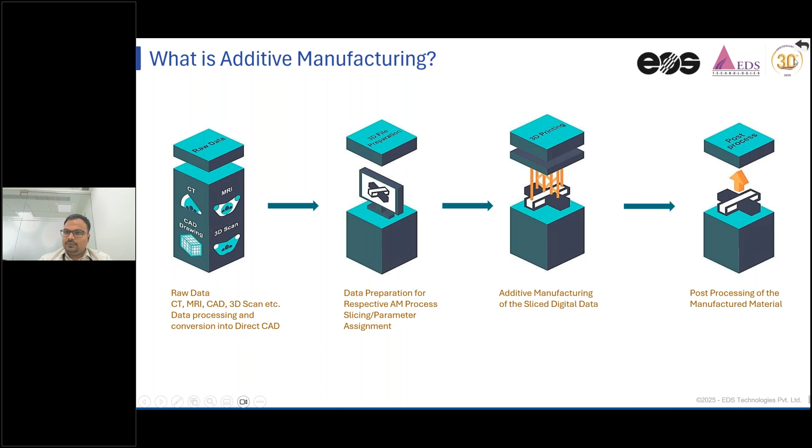Depending on the final requirement, the tolerance, the functionality, or the quality of the component, you can choose the post processing. There are several post processing methods available to impart functionality to the component. So that's a brief about 3D printing, and now we'll look into the applications of drones.

Today, mostly drones are seen in applications in day-to-day life, either solving problems of surveillance or security purposes, or in defense, where we see a lot of unmanned aerial vehicles and other drones which carry payload for attack or other defensive purposes. So there are defense drones, and then there are security purpose surveillance drones.

The second application we see from the drone industry is in the agricultural field, where we can reduce the manual effort in doing tedious agricultural work, and kind of automate and reduce the effort for mankind. The third use case is to simplify the transportation and supply of essential goods, whether it's medical supply, food supply, or any other essential supplies. The next application seen is for rescues or fire rescues, or fire operations performed through drones.

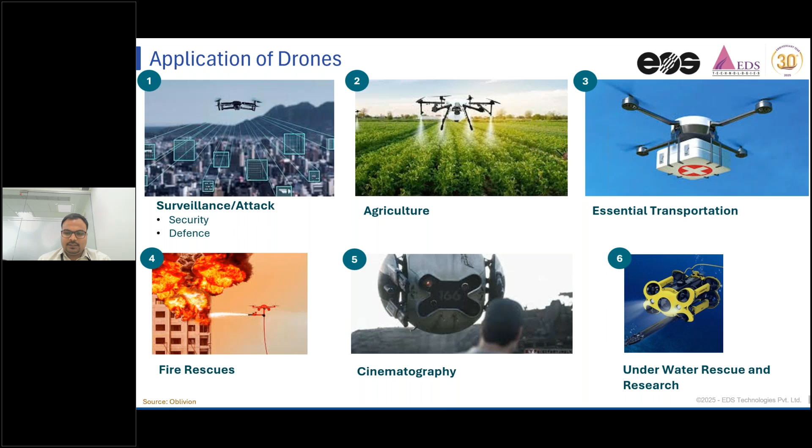Drones are widely used in cinematography also, to make movies or videos, corporate videos or commercial videos, photography etc. Next we see drones used for research purposes underwater, for Navy applications and other research works. So these are the broad areas of applications from the drone. I hope some of your drones fall into these categories of applications.

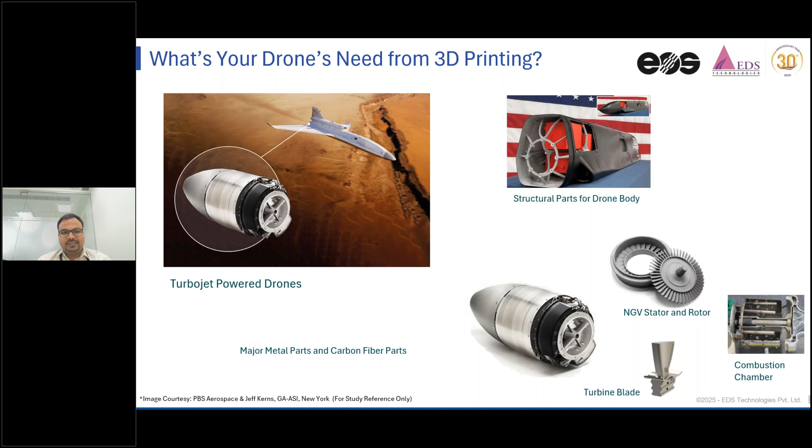Now let's understand, if your drone comes from a powered engine, that engine would require metal parts - most probably a stator or rotor, NGV stator rotors or turbine blades from compressor or combustion chamber, or you may require the complete metal frame also. So mostly UAVs or drones using these turbojet engines come from defense purpose drones, and they have a majority of metal parts and carbon fiber parts along with it.

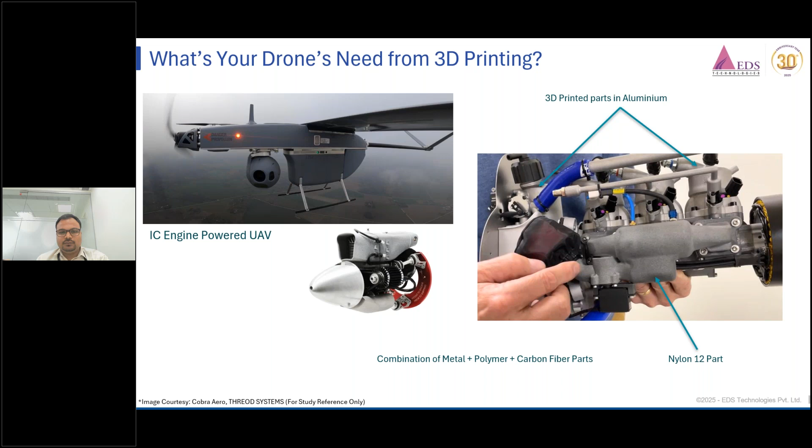Second category, if your drone is IC engine powered, you might require metal parts again - typical engine components like cylinder heads, or pistons and things like that, which are typically made in aluminum material. You might find high temperature components also, and a few plastic parts in the engine, which are nylon 12. So from this category, we see the majority of the component needed is either metal or polymer, a few polymer components, and a combination of carbon fiber parts as well for lightweight applications.

If your drone is battery powered, you might need solutions for battery management systems or batteries, and then fixtures to batteries and fitment, and the frames of the drones, or enclosures for the drones, or drone mounting.

Now, in order to solve all these challenges in the drone industry, what solutions do we have to offer?

From EOS, we have laser powder bed fusion technologies to manufacture the polymer part. We have the selective laser sintering process, which is a support structure-free process and a very productive process available in the market, and it's considered one of the industrial production solutions also from the 3D printing segment.

And secondly, for metal printing, we have direct metal laser solidification technology with us, which again uses the laser to melt the metal powders. It can melt almost any category of alloys, and give the functional part, whether it is an industrial purpose component or a lightweight component used for the UAV or drone applications.

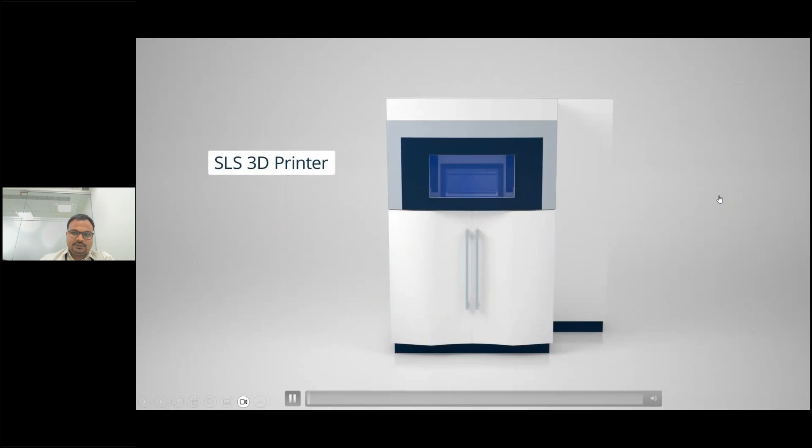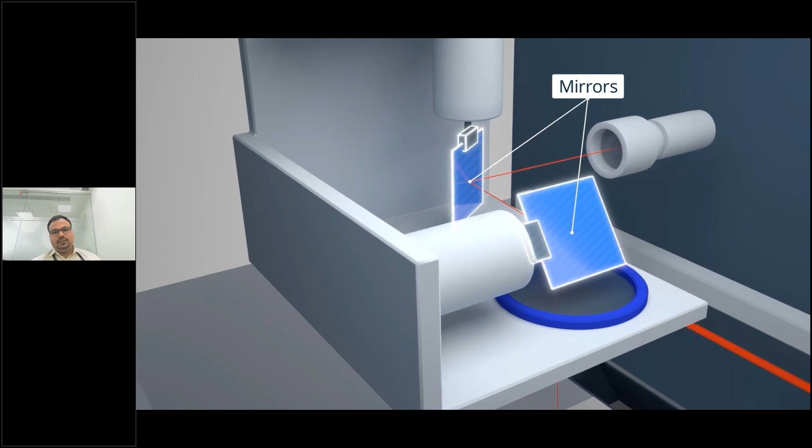So to begin with, what is the SLS process? I've taken a video illustration here. We have taken an example of our P3 machine, which has the dispensers on top. These supply the powder, and in the middle you see the recoater, which spreads the powder because it's a powder bed fusion process. Then we have heaters to preheat the thermoplastic nylon material, and then the main power unit comes for the curing, which is the laser.

The laser travels through our scanner, and this galvo scanner addresses all the contours and all the details of the layer we spoke about earlier - that layer information. This way the laser is able to address all the layered information one by one, and it begins with zero and then ends up with the height of the component.

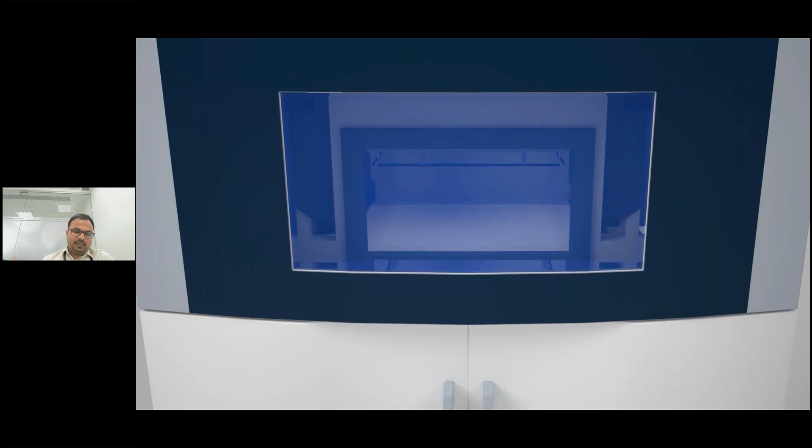And once the printing is over, we take out the exchangeable frame and unpack our component. This process is very simple in many ways because it doesn't have the hurdles of support structures - it's just depowdering that we have to perform, and our parts are ready. We take the part and directly use it. So this is about the SLS process.

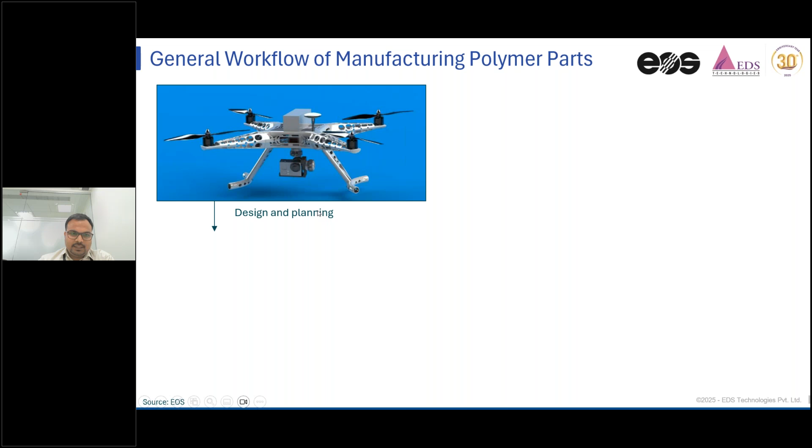Now let's understand how the general workflow works for the SLS process. So you have a design model, as I explained earlier, and then you put that design model to the printer, and we print that component. It looks like this, and then that component has to be depowdered.

So we have to just finish the component by brushing it or by doing glass beading. And once that part is finished, we take the part and directly use it for assembly, and we integrate the electronics on it, and then the product is ready. So it is as simple as that - it doesn't need any toolings, or any special curings in between.

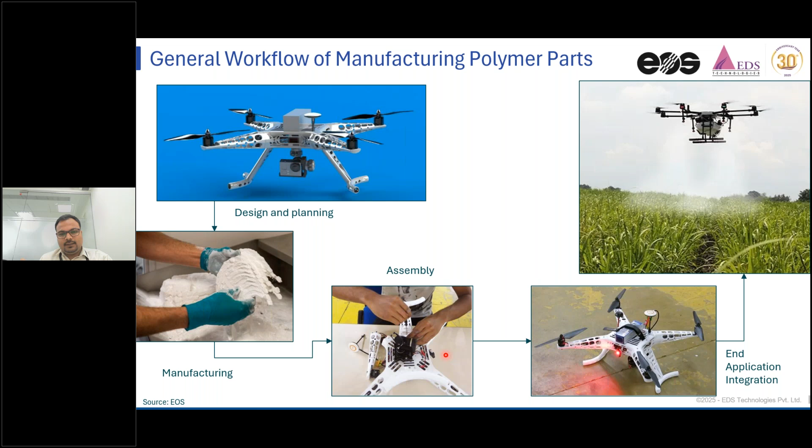Depending on the color or finish, you can choose to color the component through painting or dyes, but this is the natural finish that you get out of it.

Now what happens to the powder or the raw material? Why do we call this a sustainable production method? Because we are able to claim the old powder from the previous build and reuse it. We save the old powder, take new powder, and refresh the old powder, which is ready for the next use. This is how we reuse the material in multiple cycles and get value out of it, which unlike most other 3D printing processes, don't offer such reusability of materials. It imparts sustainability.

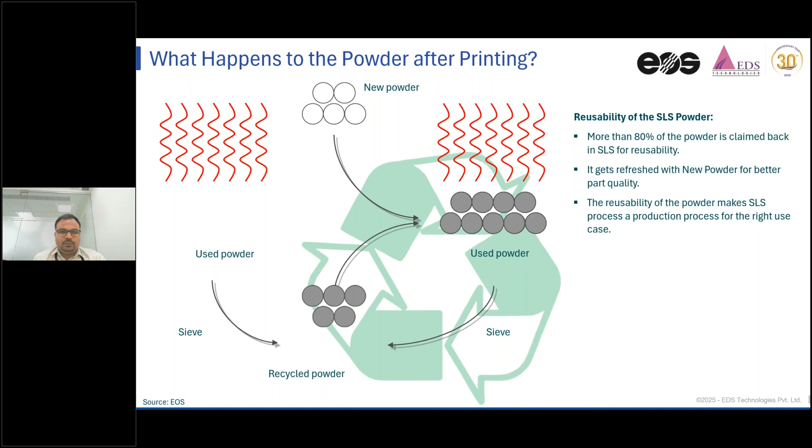Right now, with a few of our selective materials, we are able to achieve 80% reclamation. If we are printing 15 to 20% of the volume out of the quantity we have taken, we end up with almost negligible wastage in the process. Since there is very minimum wastage, this process becomes very sustainable.

For example, we take the job, the soft model or program, and the powder for the first use, and send it to the printer. The printer gives the outcome as a physical part, and the used material is recovered. We sieve that material and refresh it, and we are able to reuse it. That's how we reclaim reusability, and this material can be recycled over a number of uses, imparting sustainability in the manufacturing process.

Coming to the software part, how do we prepare the data? The SLS process is one of the simplest processes of 3D printing to prepare the data and print the components in a hassle-free manner.

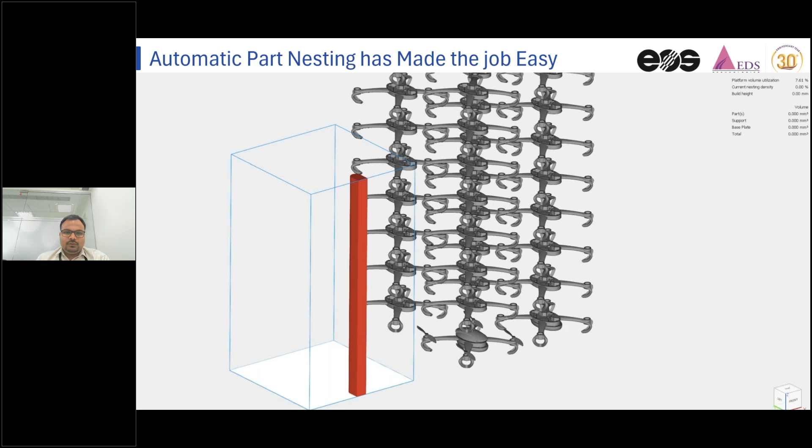We just load our data into the software, and software nowadays is smart enough to auto-orient, auto-position, and auto-place the component in the machine environment. We just give the command, and it takes care of positioning the parts the way they have to be printed, which we call nesting. With this smart nesting mechanism, the SLS process is one of the most reliable and easy processes to get your parts printed from 3D printing.

Coming to the finish, what is the stage when you can use the SLS part? Honestly, you can use the SLS part at any stage. You can take out the part, just depowder it, dedust it, and use it. It's up to your choice.

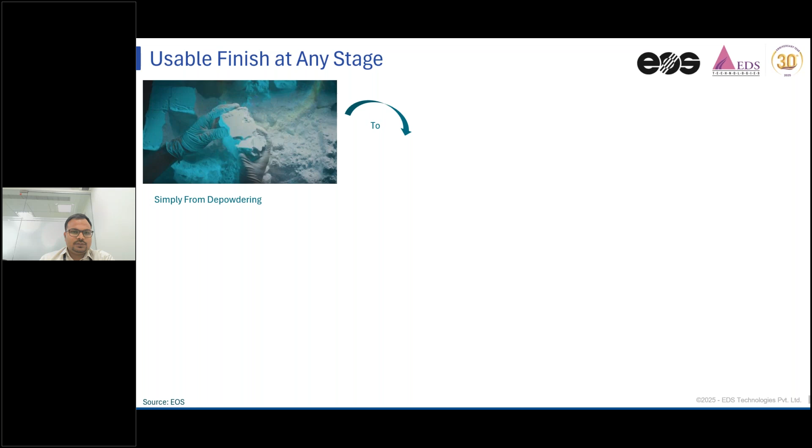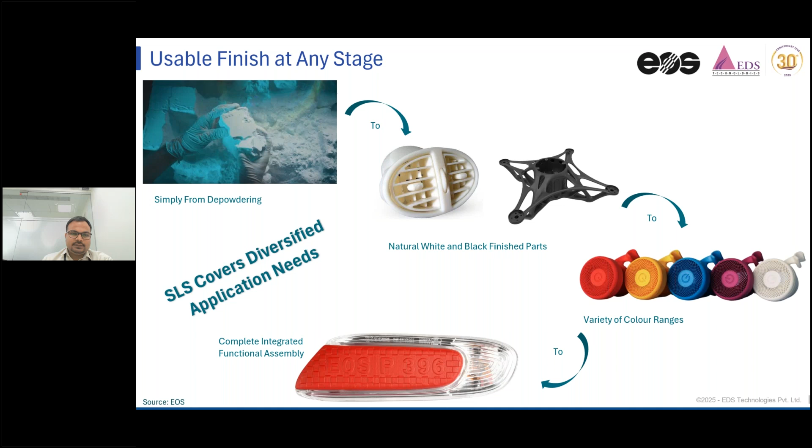You can use it in a natural white or black finish because the thermoplastic nylon materials are available with monochromatic color options, either white or black, so we can directly use those natural forms. Or we have the option to dye or paint them in a variety of colors for further use, and integrate it to perform as a functional component for your product. So SLS covers diversified application needs at any stage of the manufacturing process.

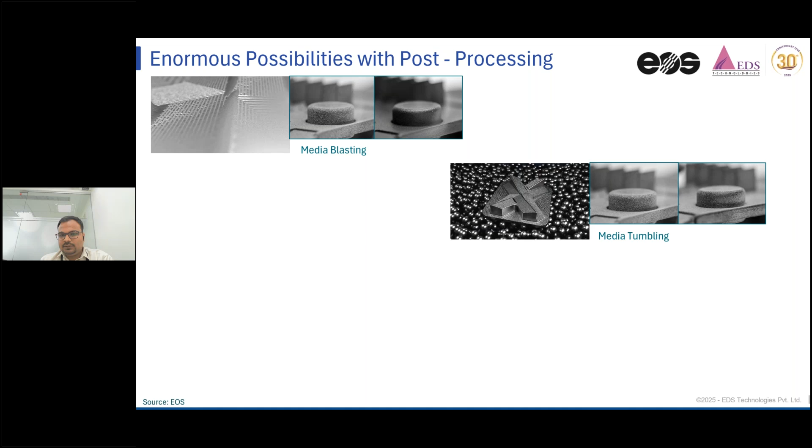There are enormous possibilities with post-processing. Once you get the part, you can do media blasting, using media like glass beads to smoothen the outer surface and get your finished component. You can also do media tumbling, in which you put your part in a ceramic media or other tumbling media to smoothen the outer surface.

You can also do vapor smoothing of the component in an alcoholic base, which smoothens the outer surfaces very promisingly. I'll show you how the finish looks after vapor smoothing. The next option, as I said, is you can dye the SLS parts in any color, since the base color is white, giving you the option to dye them in any color choice. So this is about the possibilities of different surface finishes.

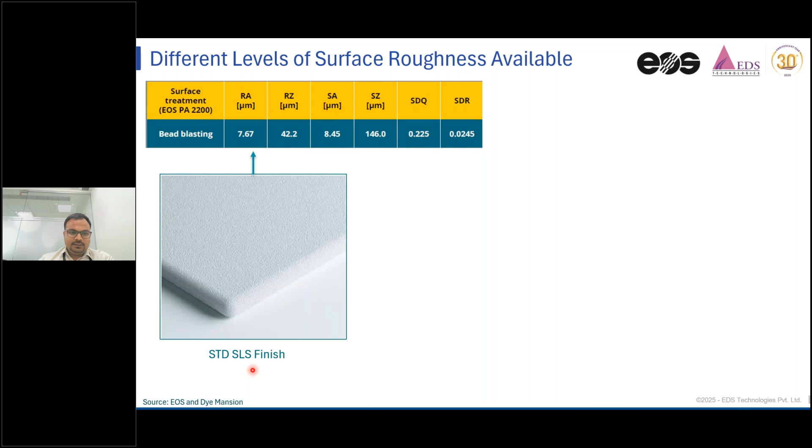This is the standard finish that we get directly from the SLS process, this is the surface you get. The Ra value is seen within the range of 7 to 8 microns, sometimes 10 microns, depending on what orientation you put the part at. But promisingly, it will be within this range after bead blasting.

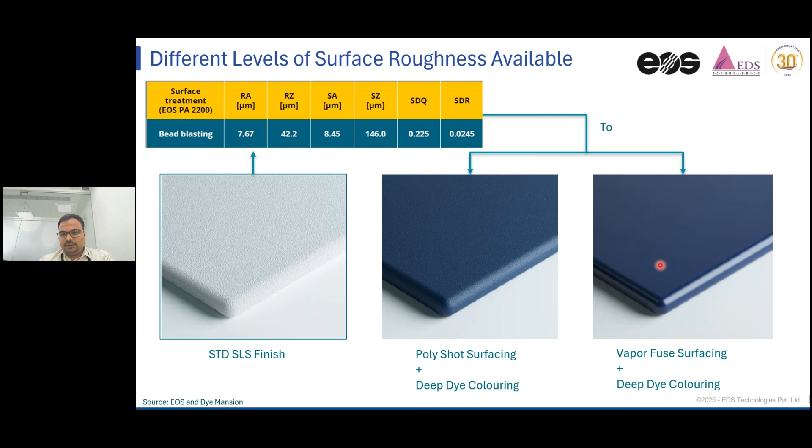You can further improve the surface finish by doing polyshot surfacing and deep dye coloring, which are options available with the company called DyeMansion. They provide ready-made solutions for post-processing SLS parts. The third option is vapor fuse, which gives an utmost finish on the outermost layer of the plastic part, making it more smoothened and aesthetically appealing, and then you can go for dyeing on that part also, coloring them as you wish.

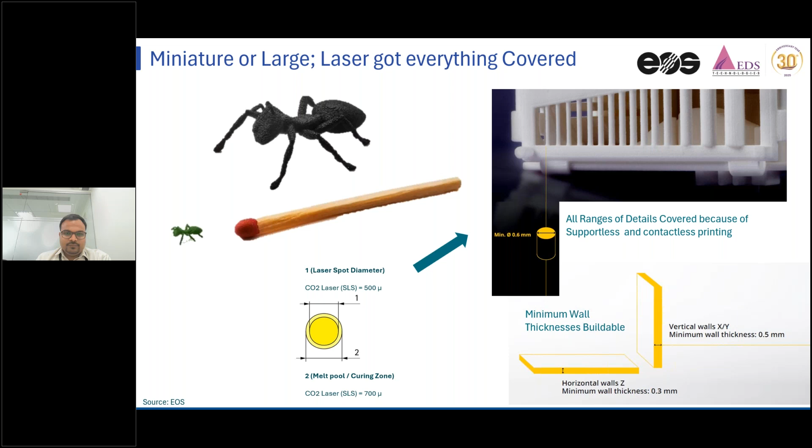So this is about the size of what can be printed. If your component has threads, or requires internal or external threads - for external thread, we can start printing from M8 onward, and for internal thread, we can always put brass thread inserts on the plastic component, because our plastic is thermoplastic and supports thermal insertion and fitment of those inserts, and they're very reliable. So we can always turn around our functional part using these thread options available.

Deconstruction of larger polymer parts. In 3D printing, the build volumes are very limited, and if your component is larger than the build volume, this concept comes into picture, which is also design for additive manufacturing. We have to redesign the component during the process if it doesn't fit into the build volume, and if the design permits the model to be deconstructed.

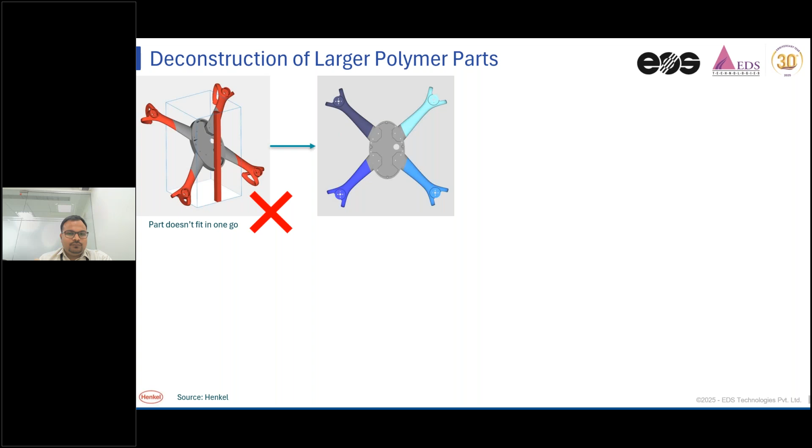So we cut the model and then fit those pieces for printing, which is quite popular and usable technique for components and prototypes in the industry. This way, you can ensure the fitment of the component or subparts of the large component inside the build area of the machine, and then later join them using industrial glues that are available.

However, to ensure the best strength in the joint transitions, there are joining techniques I'm displaying. The best results, seen in all three criteria - self-alignment, bond area, and stress distribution - come from a tongue and groove kind of joint. You can always define this joining technique on your large component, and it will help reduce the shear stress up to a certain level, and your parts will be strong at the end of the join. Once you paint the component, it won't be visible that it was joined earlier.

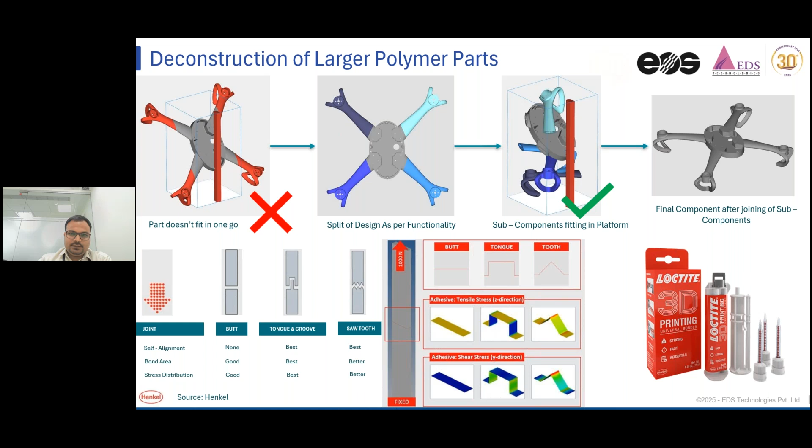So this is the way bigger components can be manufactured using the SLS process. The benefits of the SLS process we have seen so far - let's have a quick look again on what are the overall benefits of SLS.

First, it doesn't need tooling or any tools for making the parts, so it's a tool-free process. It doesn't require support structures, unlike any other plastic manufacturing methods or plastic 3D printing methods.

The powder is reusable, so this reusability of the powder makes the process more sustainable, more economic, and affordable. This requires minimum post processing on the components because, as I mentioned, we can just depowder and start using. It has the least chemical exposure, and you can imagine printing the component on the fly, which most other 3D printing processes don't offer.

You can always go in the third dimension, putting as many parts as possible in the available space of the printer. The cost per part for production is very low because of the reusability concept of the powders, and the laser process is much faster than any other 3D printing, giving the highest throughput.

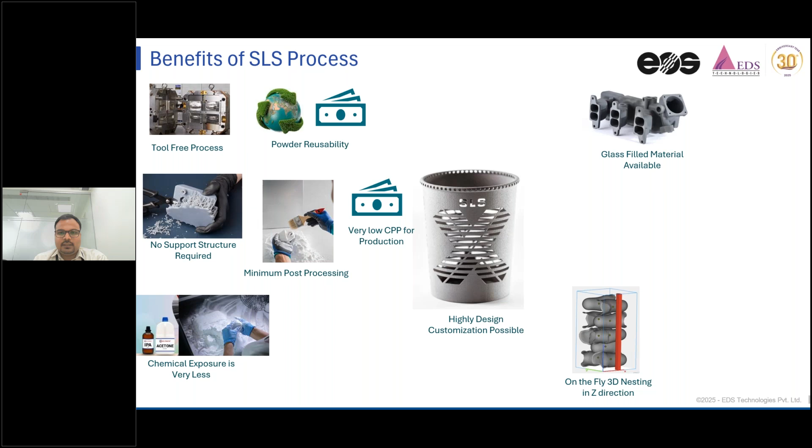We have glass filled material, composite materials, carbon compounded composite materials, and flame retardant materials with us. This SLS process doesn't require any post curing, so the cycle time to manufacture is very minimum, and most materials from SLS don't have UV damage.

Over time, you don't experience any UV damage on these materials, so they are very reliable. You can always manufacture parts with suitable functionality and test them as per your requirement. And as I said, functional thread manufacturing is also possible.

It can print very minute parts with details starting from 200 microns with our CO laser, and 500 microns with our normal CO2 laser. And part deconstruction is possible. If the part is very large or very big, you can deconstruct it, make it, and join it later.

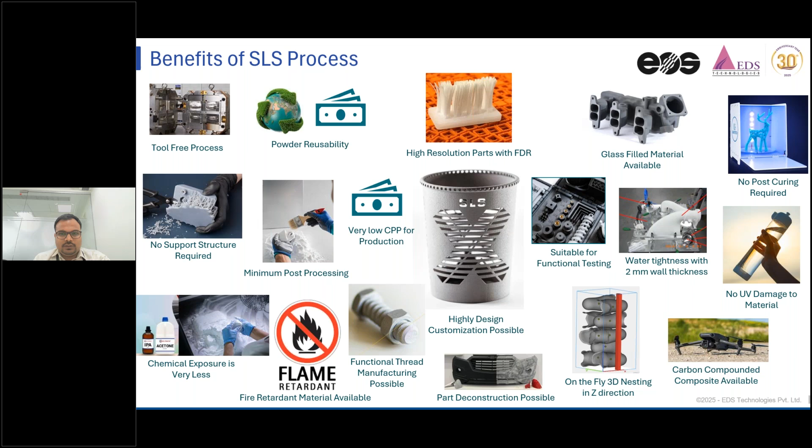The components are watertight, with 2mm wall thickness onward. So these are all the benefits that are there with the SLS process.

Now let's look into the DMLS process. What is DMLS? It's basically a metal printing technique, which is again a laser powder bed fusion, which uses powder and a laser source to melt the material. These parts are melted on top of a substrate plate, and it happens in an inert atmosphere.

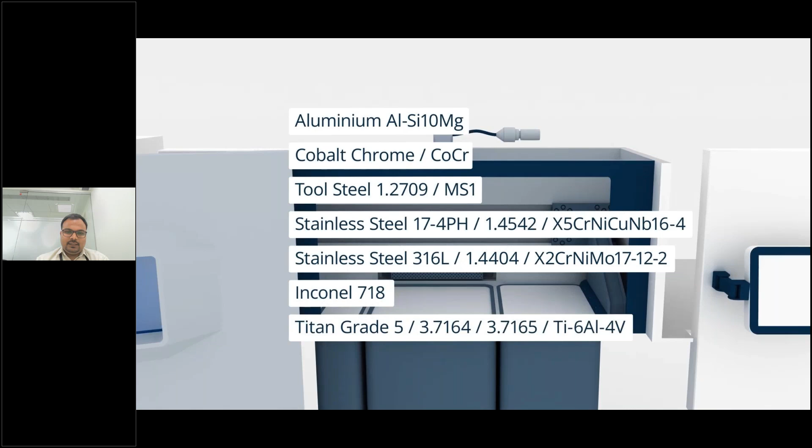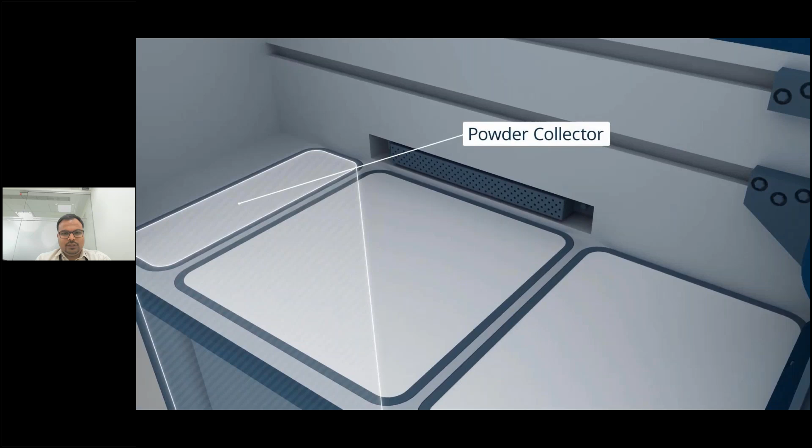Any alloy printing is possible with DMLS, whether it is aluminum alloy, inconel alloy, super alloys, or titanium alloys, copper. Today we have more than 40 to 45 alloys already proven in our machines, and new alloys are getting developed every day through our machines.

Our users are using these machines for innovating new materials, because this machine supports third party material, and you can always try out new materials and fuse them using the laser source.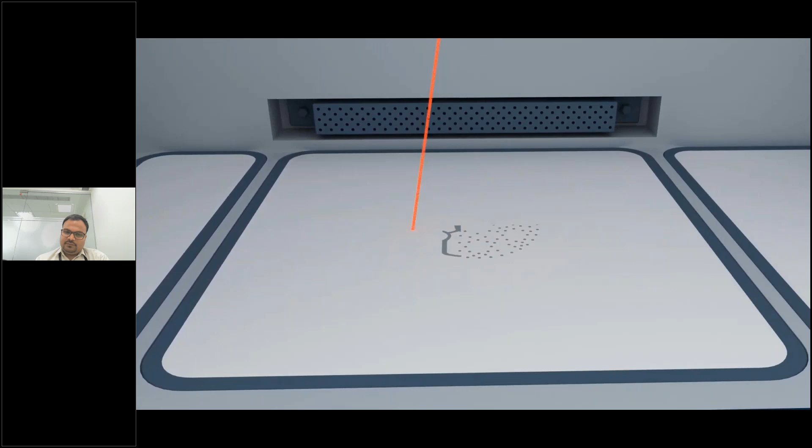This process is again very simple. It recoats the powder in layer thickness starting from 20 micron to 60 micron or 90 micron, depending on the requirement. Once the coating is done, the laser addresses those 2D layer informations.

Once the printing is over, we depowder and take out the part, put it in a furnace for stress relieving, and remove the support structures. The DMLS process comes with support structures, of course, and those need to be removed after the stress relieving process.

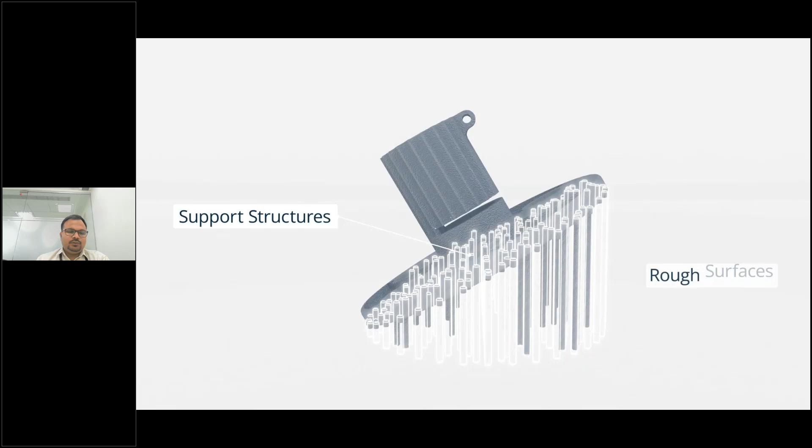After that, we can choose what amount of post processing we need to do on the part, whether machining, EDM, wire cut, or polishing. All of these processes are supported by our 3D printed materials. So this is about how the DMLS process works, starting from powder form to the final component.

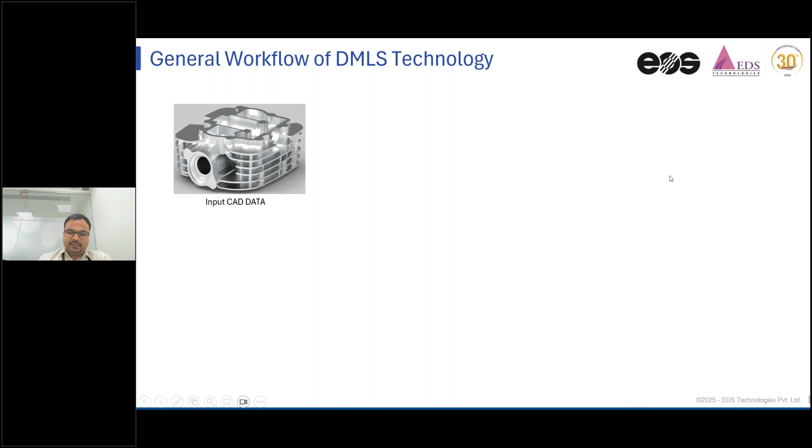So the general workflow of DMLS technology, if you want to understand, I've taken an example of a cylinder head here. You have an input in CAD data form, and then we have to take that CAD data into the data preparation software. It can be a Magics software, or maybe a NetFabb software.

We do the orientation of the part in metal. Most of the time, the metal orientations are preferred to be manual, with experienced application engineers, because it requires attention for heat transfer and other complexities in metal printing. This is addressable using different software, again.

In the data preparation, we do orientation, we define the support structure that supports the process, supports the material, and also works as a heat transfer media. Once the data preparation is done, we slice it and send that information to the printer.

The printer addresses those layers and details, scanning and melting it, that we call DMLS. After the printing is over, we take out the build and put it in a furnace for stress relieving, remove the support, and do other kinds of post processing, like shot blasting, or we may go for machining depending on the requirement, and we get the final finished component.

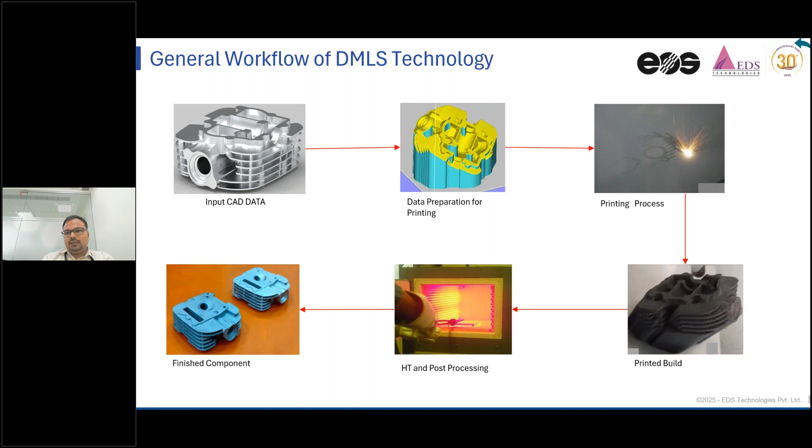So this is about DMLS, how you get the metal part out of the digital data that we have. Okay, so this is about the manufacturing solutions that we have to offer.

Now let's have a look into what all polymer materials we have in SLS. So we have nylon 11, nylon 12, and different other grades and subgrades of nylon 11 and nylon 12. In nylon 12, we have glass filled material, we have FR material with us, flame retardant material tested for many other applications.

You can use it for your drone applications, where flame retardant operations are intended, or if you want to use it for your battery pack, you can opt for it.

And then we have the newly launched PA950 HD, which comes with the highest reusability. It is reusable at 80%, so we'll talk about it later. And then we have a composite, the polymer and metal composite, which is alumide. It's a mixture of nylon 12 and aluminum.

We have flexible material, which is thermoplastic urethane 1301. We have carbon filled material PA640 GSL, and both PA11 and PA12 carbon fiber material which can be used by the drone industry. We'll talk in detail about it. So these are all the broad material lists that we use for SLS.

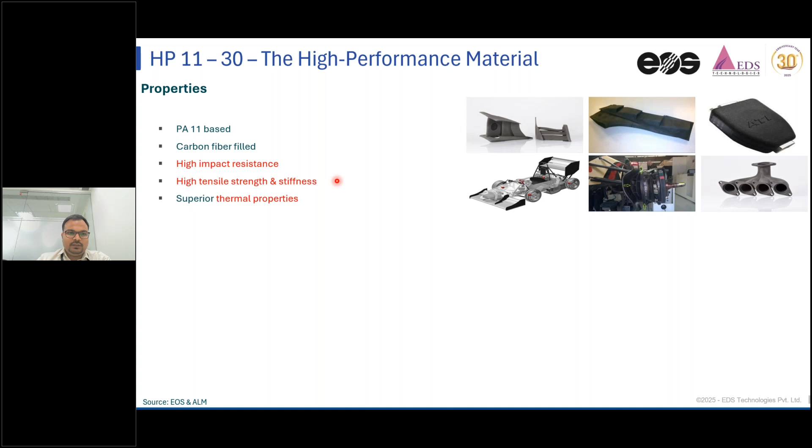As a basic composition or basic polymer, it is a melt compounded carbon fiber, which has the carbon particle melted in it and then compounded. So at the end of the day, when you fuse your powder into the physical part, you get more promising properties along with the carbon particles, which are superior, or better than other carbon fiber composite materials available in the 3D printing industry.

And these materials are highly reusable again. 80% of the material can be reused.

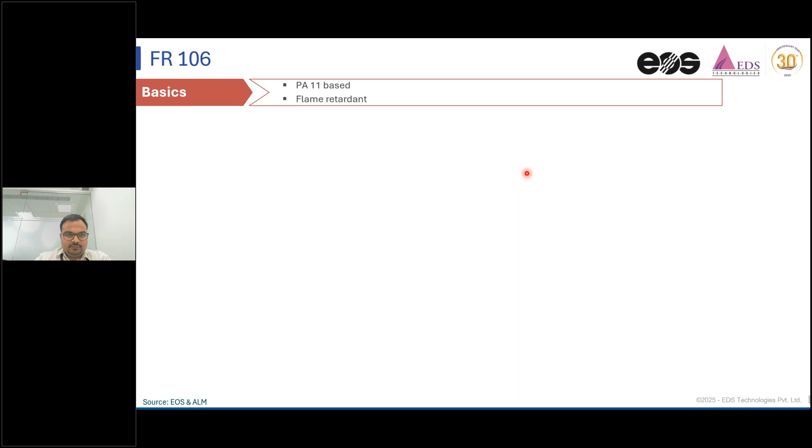We have flame retardant material, which is FR106, again PA11 based flame retardant material. It has high impact strength, and it is tested and complied under FAR 25.853, which is a vertical burning test. The application for this material includes automotive, drone, aviation, and interior components of the aviation industry.

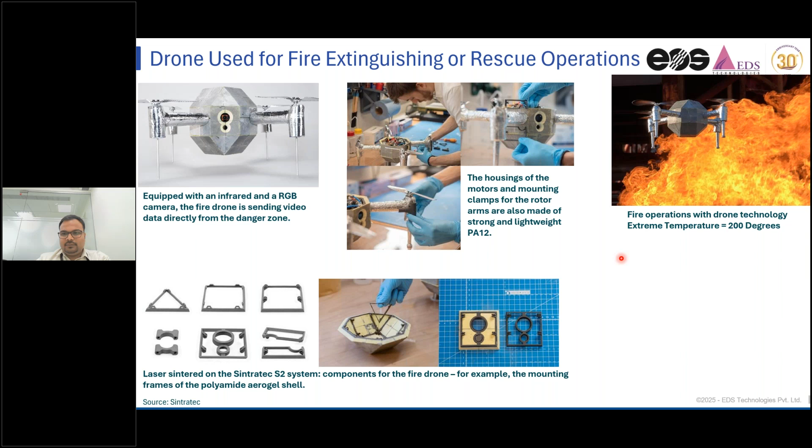So what is the application with the flame retardant material? I have taken an example here where people have used polyamide 12 based material. This is not exactly a flame retardant material, but flame retardant material will perform better than this, because this is the natural polyamide 12 material they have used, and they have literally put it at 200 degrees temperature, sent a drone to check how it is able to protect the internal electronics and internal components of the drone.

So with the FR material, you can expect more protection than with our normal polyamide 12 material.

We have another carbon fiber material, which is PA640 GSL. It is a PA12 based material again, nylon 12, and it's a mixture of carbon fiber and hollow glass beads filled. The best part of this material is with the same amount of mechanical strength, it is 10% lighter than other available plastic material in the market.

So it offers another 10% advantage to your drone design, and you can imagine more endurance of your drone when it is running, because the flight ratio is increased and strength to weight ratio is also increased with it. It is easy to process and gives excellent surface finish, and is available in matte gray and matte black gray color in appearance.

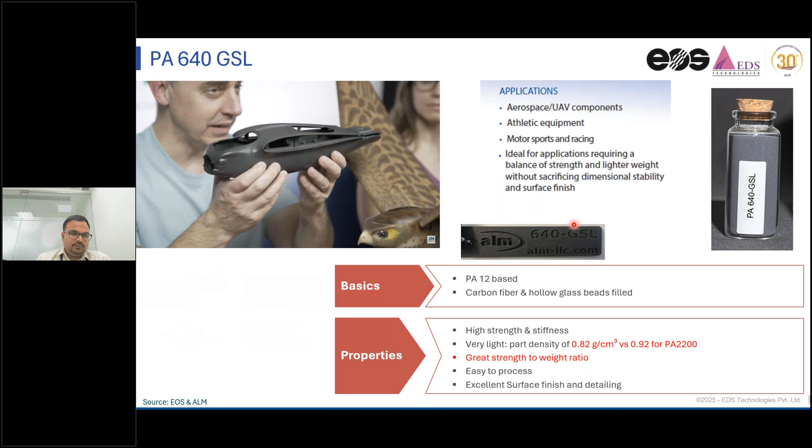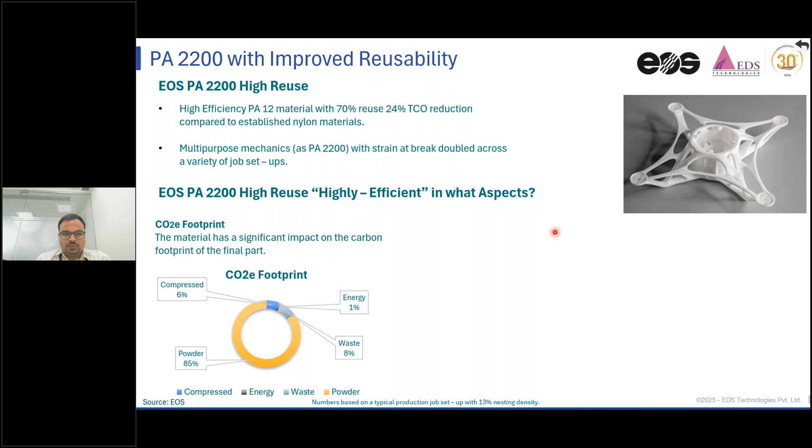With our new systems, we have improved the performance of our existing PA 2200 material. Earlier it used to be 50-50%, now with the new systems we are able to use 70% old material and 30% new material, which is a great win for regular users of nylon 12 material. And carbon footprint is also decreased with the new offerings of nylon 12 material.

Okay, so this is it about the polymer materials that we have to offer.

Now we'll jump into the metal materials. So for metal, we have lightweight aluminum alloys, different aluminum alloys with us, and then we have lightweight titanium alloys to offer. Titanium can be used in different areas of drones.

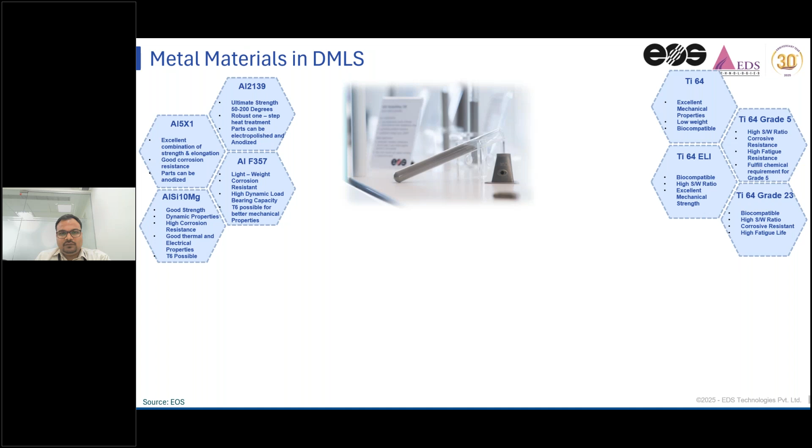It can be used for structural components, for fixtures or any other metal component, because it is literally half of the steel in terms of density, with a great strength offered, a great fatigue life and strength with it.

Then we have super alloys for applications like mini turbojet engines where temperatures are very high. So we have Inconel 718, 625, 939, and Hastelloy. We also have copper to offer for heat sink applications and other temperature applications.

We have copper alloys as well as pure copper with us. We have cobalt chrome MP1, and we have different stainless steels and high strength steels also, if in case any requirement is there from the process side or from the production side.

Now about high temperature applications. We have Inconel 718, which has a maximum service temperature in the range of 700 degrees. Then we have 625 in the range of 800 degrees. We have Haynes 282, and we have 939, which is in between 850 to 900. And we have other Hastelloy, which is close to 1100 degrees. So these are all our high temperature metal alloys, the super alloys available with the metal 3D printing process.

Now we'll have a look into what is design for additive manufacturing. Before I jump into this topic, I'd like to explain that people in industry take design for additive manufacturing as a typical perception, but design for additive manufacturing can be any simplified process, or I would say the process in 3D printing which solves your problem.

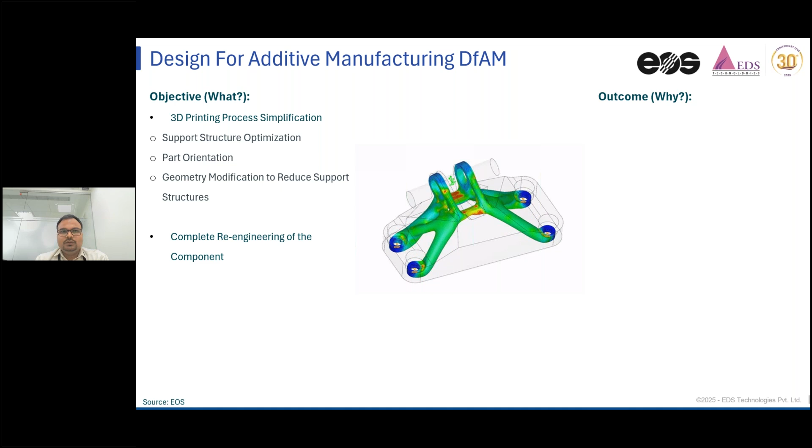We can also use DFAM for complete re-engineering of the component for enhancing its performance or solving any industrial problems. So we can do a complete re-engineering of the component starting from design to manufacturing.

And then, of course, one of the popular DFAM tactics or techniques is topology optimization, where we always aim to reduce the mass of the design or component and lightweight it, and assembly simplification, where we aim for simplifying the assembly and reducing the part count.

And design integration with lightweight multi-scale structures. This is quite popular in a few industries like medical, and of course it can be used in the drone industry, where you can integrate lattice structures or other structures like gyroid structures used for heat dissipation applications and most heat exchangers. So there are several other lightweight multi-scale structures which can be integrated into the mechanical part to reduce the weight.

And we can also apply design for additive manufacturing driven by the material. So if we are developing some component with an alternate material, we can always redefine the design boundaries with respect to the material's mechanical strength that is available, or what we are targeting and what we are using for the 3D printing.

And what outcome do we get out of applying these DFAM tactics? We get cost optimization. Most of the time our focus is to reduce the cost more and more. And we always prefer quality to be enhanced at any stage.

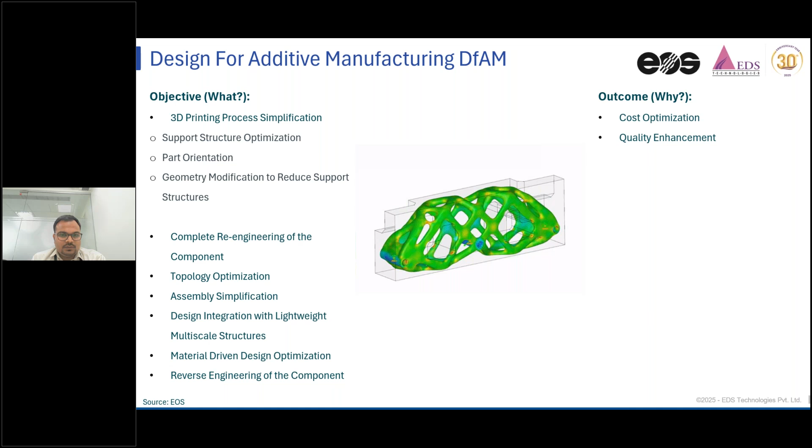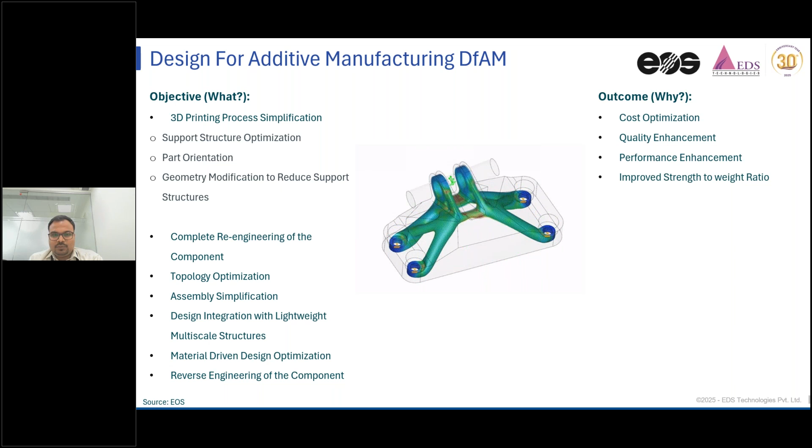So we try to reduce the effort taken in the 3D printing process and reduce the cycle time of 3D printing always by using DFAM, and performance enhancement of the component. The end goal of applying DFAM is that the component should function and perform qualitatively and up to the mark, which we have to ensure using DFAM. That is the outcome, along with improved strength to weight ratio, by using topology optimization or lightweight materials in the process, we can improve the strength to weight ratio of the actual component.

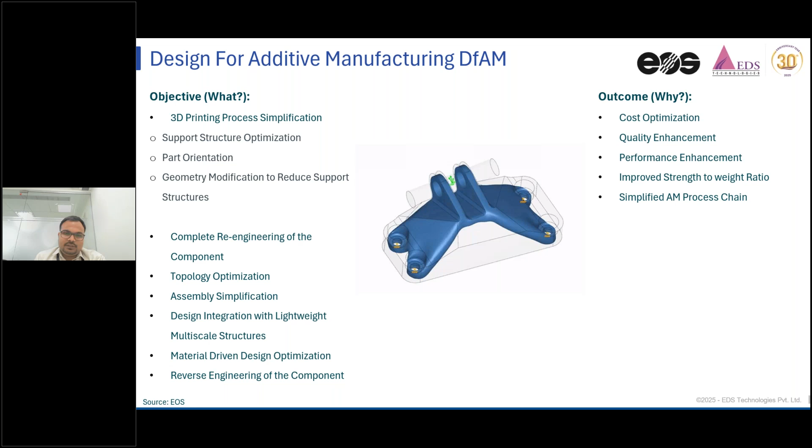And the next outcome is a simplified AM process chain. If we are redesigning the component with respect to the environment of 3D printing and aiming for batch production through 3D printing, we can simplify the complete production process chain with respect to 3D printing. We can target a cost, target the number of parts per cycle, and simplify the process chain using 3D printing, and 3D printing will become the production process for that.

So what is topology optimization? Here I've taken an example of a sheet metal part which has multiple parts, and then it is integrated into one assembly. It is 40% lighter, 20% stronger in terms of the material and the processes used.

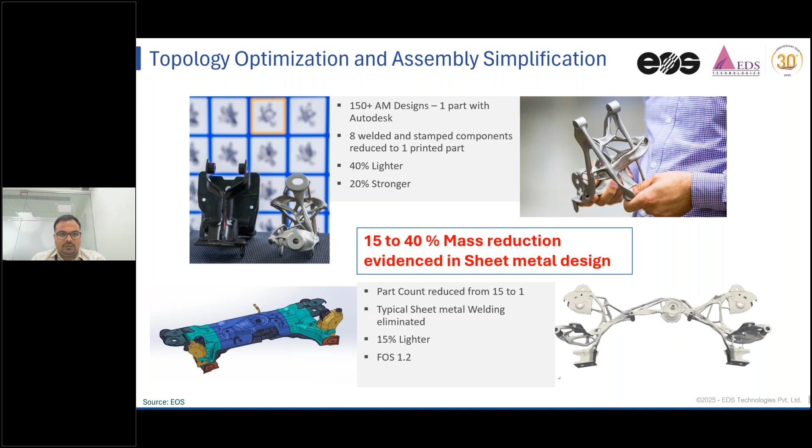I've taken another example from the chassis, which is originally a sheet metal part, but it is topologically optimized and is 15% lighter with a factor of safety of 1.2. So for a typical sheet metal component, we can always aim for a minimum of 15% to at least 40%, depending on the component we're choosing for optimization. But we can always look at optimizing designs using topology optimization, and it will reduce the effort taken by 3D printing if we're not choosing the conventional design.

One more example I have taken from the drone industry itself, for the design for additive manufacturing. So a drone typically has mechanical components, structures, and fasteners, and the electrical components, GPS module, battery, and rotors, and the engine controllers.

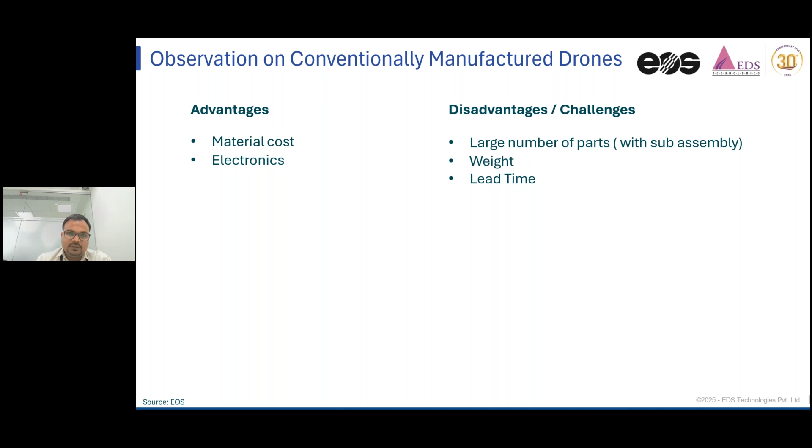So our aim is to observe what are the drawbacks of the conventional design. The advantage of conventional design is the material cost is cheaper to procure, and standard electronics are designed and meant for that, but it doesn't offer most of the protections because they have a large number of parts. Conventional drones have a large number of parts.

They have more weight and lead time is more because each and every part has to go through a different manufacturing process. The electronics are unprotected most of the time unless the design is simplified. If you go with the primitive design, limited innovations and customization is available because of the challenges of forming.

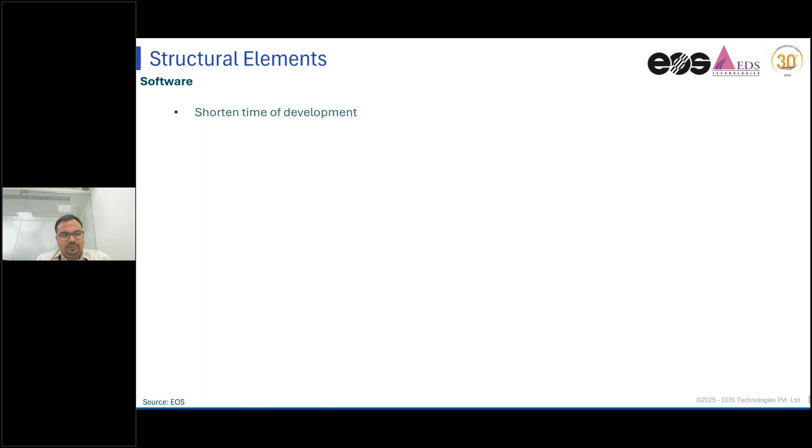So how do we address all of this? If we want to shorten the time of development and optimize it, we take that old design model and go for form finding, then do the boundary condition analysis, FE analysis, and start remodeling, getting different possible shapes, considering factors like part integration for payloads, multiple parts, and complex geometries for aerodynamics and shape, and functional integration of the electronics, and customization can be integrated.

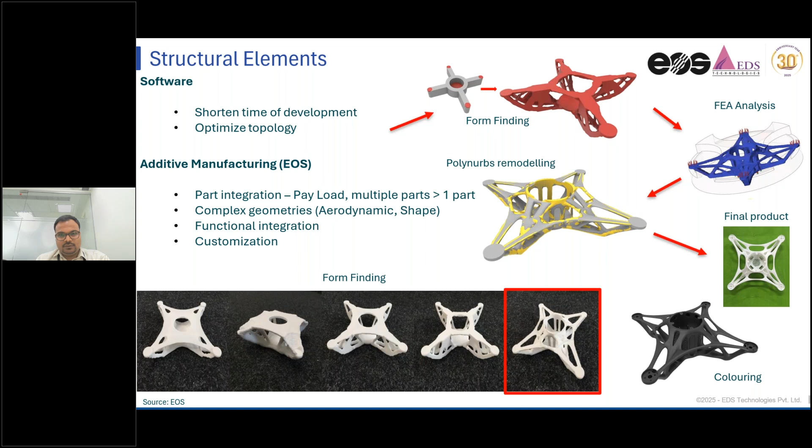Encountering all these criteria, we can choose among these different shapes available in the iterative method of topology optimization, and then leverage it into the drone industry. So the main advantage here is you don't have multiple parts to deal with. Your electronics is more protected when you integrate it finally.

The economic value proposition - we have taken an example with our P3 system, with a 273 centimeter part and 76 height part for the frame. In one cycle, we are able to get 9 sets of the drone and various other propellers along with it. So this is an example of how, per cycle or per build, we can leverage multiple parts per cycle.

And the benchmark quantity for this is 216 parts per month, and you can look at 2,592 parts per year with the size of this drone with one machine. And this is not where it will stop. We now have a new system which is more productive.

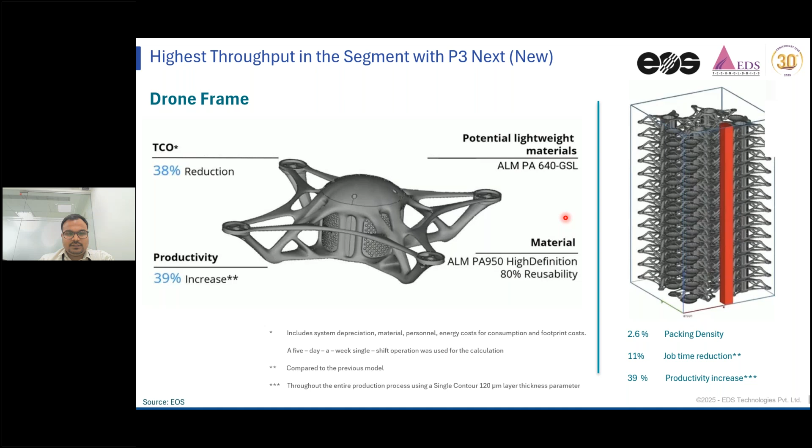So this is the illustration from the old system. We have reassessed it, and this is the illustration from the new system, which is our P3 next generation model, P3 next. You can see how many parts are packed here. We have increased the productivity by 39% compared to the previous model for this example, and overall the machine's productivity is also increased by 50%. We'll talk about it later, but this is the example in terms of the value proposition with the new system.

The other value proposition is the number of parts has been reduced from 41 to 27. The weight is reduced by the topology optimization. The lead time is reduced. The innovations have

imparted, the customization is possible now. You can look at varying the thicknesses as per your requirement internally. You can make the frame hollow also, and use it for different purposes altogether. So there is a high amount of customization, whether it is for fitment of the electronics or any other component in the redesigned frame.

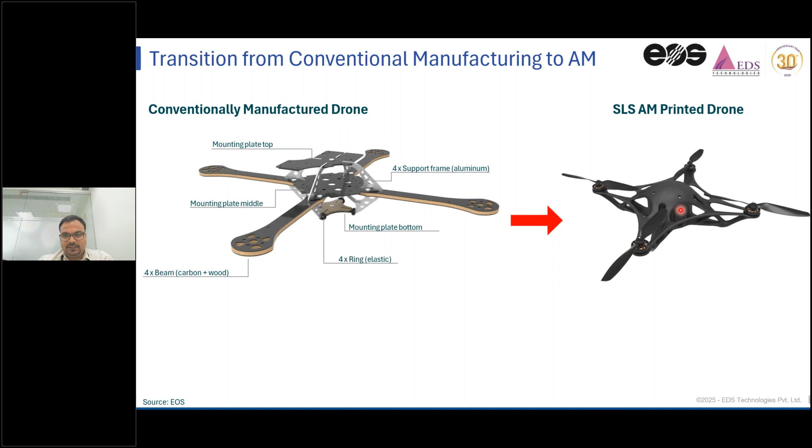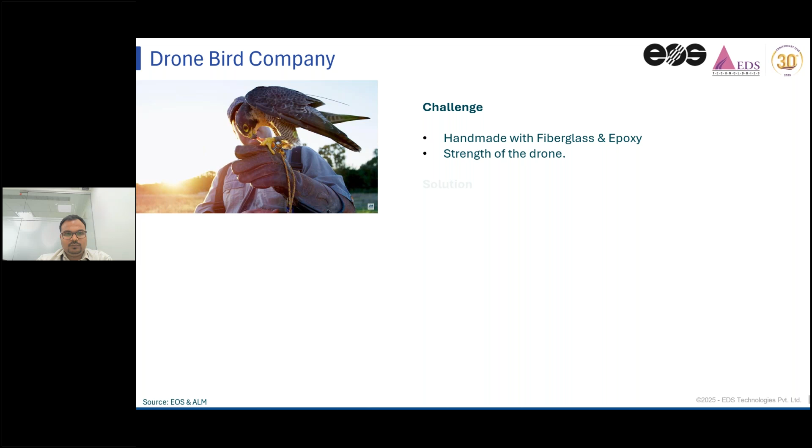I'll jump to a few case studies here. This is one drone bird case study from Falcon. This drone bird is used for getting birds away from the airfield at some airports. It's manufactured using the nylon 12 composite material I mentioned, PA640 GSL, which is a lightweight carbon material. It resulted in faster delivery time, lower production cost, and versatile shape.

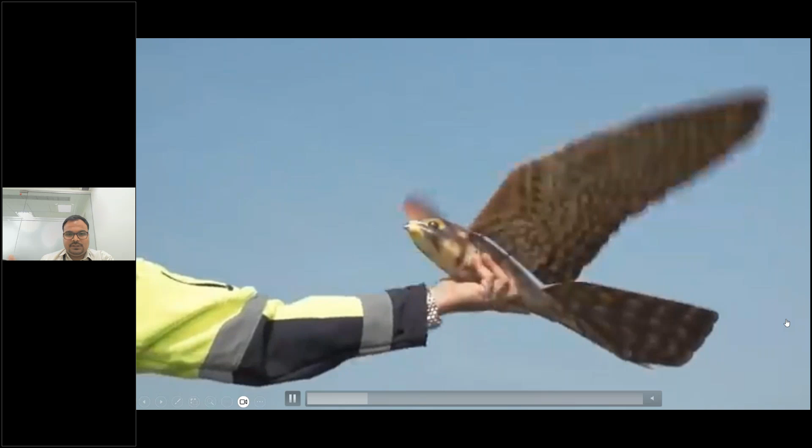Overall, this drone bird is 750 grams in weight, and it gives an endurance of 15 minutes. It can perform the maneuvers of a real bird and mimic its motions, which is used for distracting and getting birds away from the airfield at airports.

This is a very good example where we can think out of the box in terms of designing, applying different DFAM techniques to manufacture drone components.

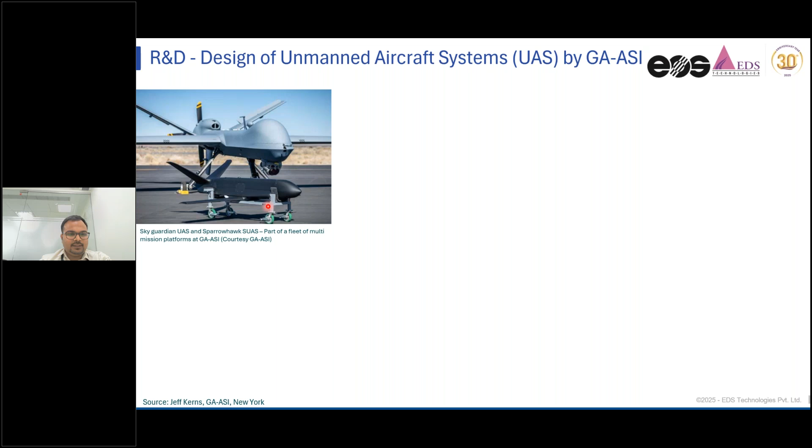Coming to the next case study, from defense - this is a scaled-down design from a UAV. The complete structure is manufactured using aluminum, you can see here, and most of the other components are also 3D printed. So 3D printing is solving a lot of industrial problems and challenges, whether in the enterprise drone segment or the defense drone segment.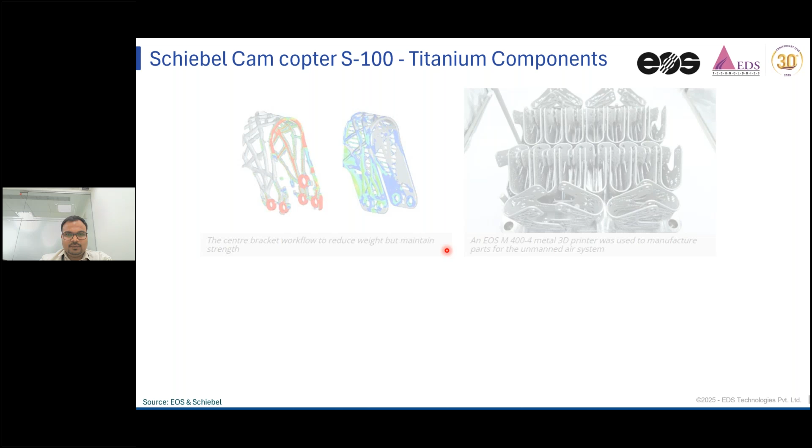This is one more example of a titanium frame printed through our system. It first got redesigned, and then produced using our M400 system and successfully installed.

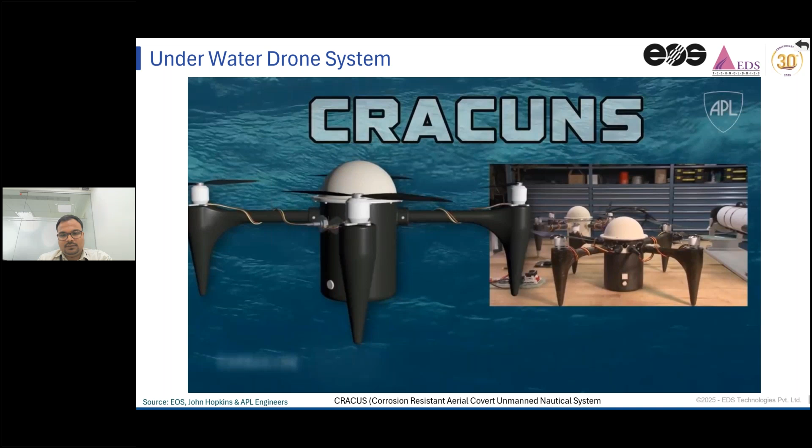This is one more case study from the APL engineers. It's a CRACUS drone, which is a corrosion-resistant aerial covert unmanned nautical system. It's used for underwater research and surveillance, and it can fly several feet down in the water, and can also fly above the water level in the air. This is used for carrying load and for naval applications.

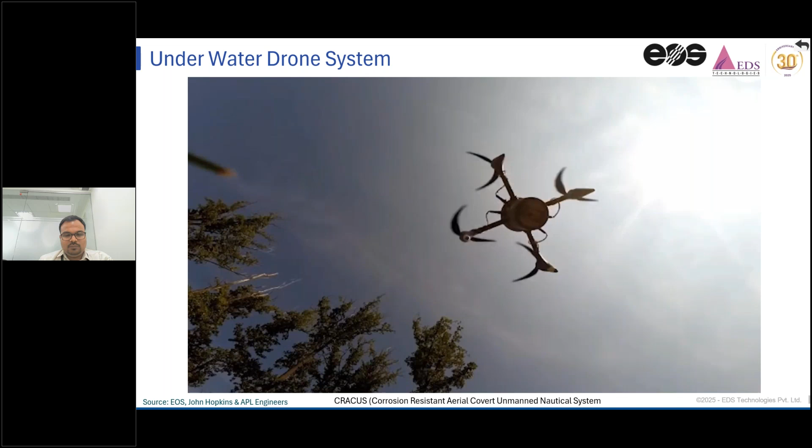The challenge for this drone was to make it corrosion-resistant, keeping it that way in a very rugged, especially humid environment. So the challenge was to keep most of the components dry, and they were successfully able to address all those problems using the EOS SLS solution, the SLS process.

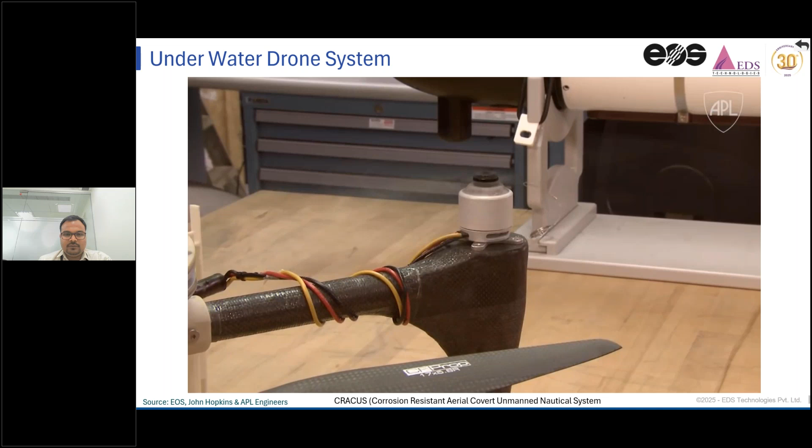They printed it in nylon 12 material, and most of the electronics and other components were packed. Only the exposed components, which are motors, were coated with available industrial waterproof coating, and they put it underwater for 2 months and saw no evidence of corrosion due to water. This is a great example of how 3D printing is helping most industrial applications in drones.

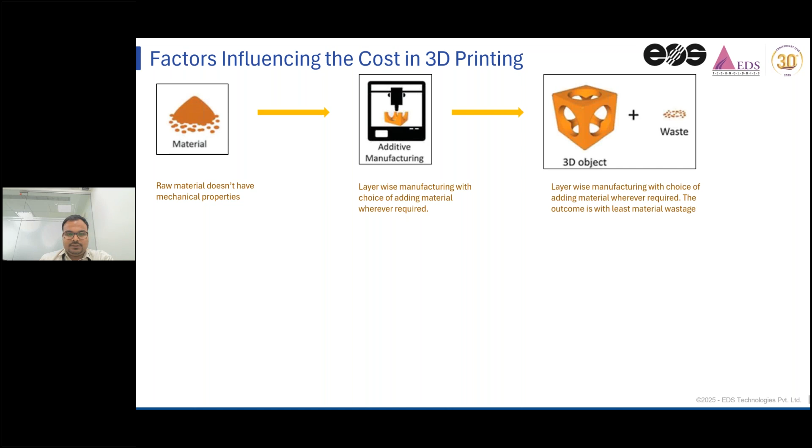Okay, we'll come to our last topic of the webinar, which is cost analysis. I won't take much time for this. As I've been explaining, 3D printing involves taking a material and adding it to form the shape, ending with the least wastage possible. So what are the different cost factors responsible for the cost of the component?

So the first factor is the raw material - raw material used on the actual part, raw material wasted in processing the powder, and material wasted in the support structure. In our SLS case, support structure is not used, so we don't waste on that area, which is about 20 to 30%, sometimes up to 60-70%, depending on the geometry being printed. That is the first factor.

The second factor, which has the most weightage in the cost, is the printing process. The third factor is post-processing and other things like packaging, forwarding, or other processing on the component. So there are three major factors. If we look at the graph of conventional manufacturing between unit cost and output versus 3D printing, conventionally the process takes most of the investment upfront, and then you get your payback over the period of time and use of your investment.

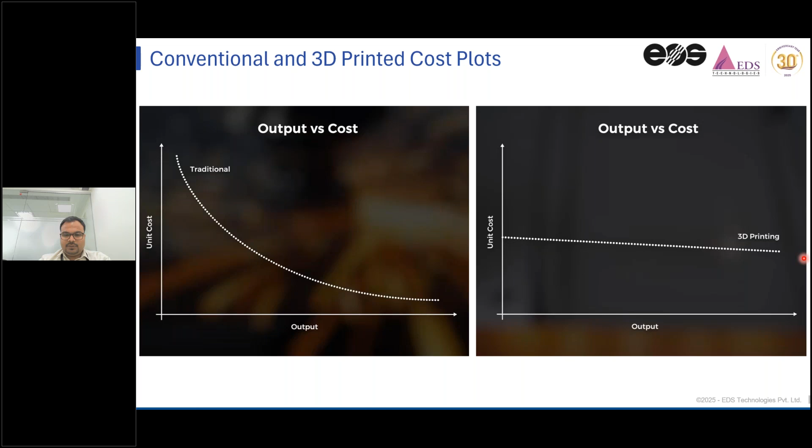So up to this point, whatever output or quantity we are getting is always less costly compared to traditional methods. Now let's understand why this 3D printing process curve is flat, because our machine processes are quite identical. We don't change much once we do the first batch or few first batches. After that, most of the processes are very constant, and then there is material cost, which is anyway constant.

So as I said, with our new system we have increased our productivity by 50%, which is P3 Next, by improving on the processes.

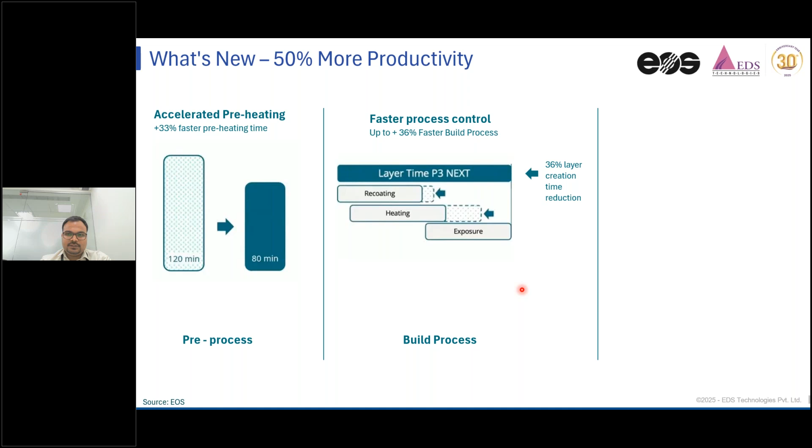From this to this, we have achieved the following: first, reducing the time in pre-processing and preheating from 120 minutes to 80 minutes. Then in the building process, we have reduced by 36%, and in post cooling, we have reduced by 90%. So overall, we have increased productivity by 50%, and machine availability is guaranteed at 90%.

So now you can imagine using this machine almost every day for your day-to-day production purpose. This is where I have taken examples of different production scenarios and costing.

In the first scenario, we have the example of prototyping, the second scenario is batch production, and these are examples of mass production using 3D printing.

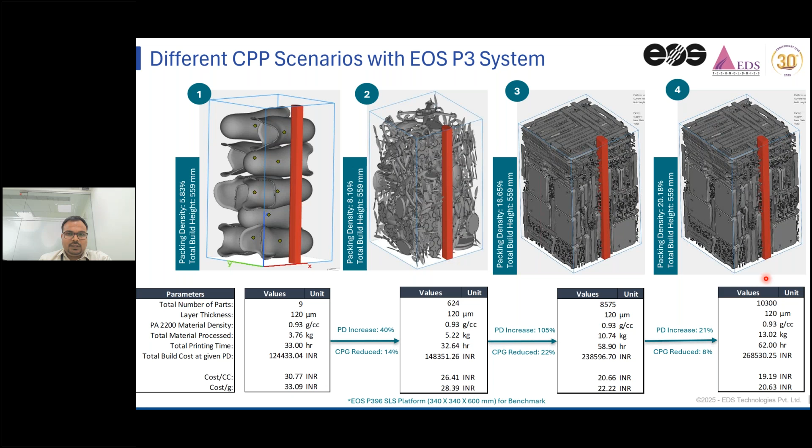You can imagine if you have the equipment in-house to print 1cc of component, 1cc of the plastic material, the basic nylon. It may range from 15 rupees to 20 rupees, depending on how you are handling and managing the powder.

And this can be further optimized by optimizing the powder reuse.

One more example on metal, not only on polymer - in metal also, we have simplified process parameters where we are able to print in the third dimension.

For example, with our production machine M300-4, 1 kilowatt, we have taken one example of the IC engine cylinder block, where there are a total of 36 cylinder heads which are printed in one go.

This is possible with the help of our 5x increased productivity through the quad laser, which is increased from 200 grams per hour to 1000 grams per hour. So this results in just one cylinder per hour, with the cost almost equivalent to the pressure die casting cost.

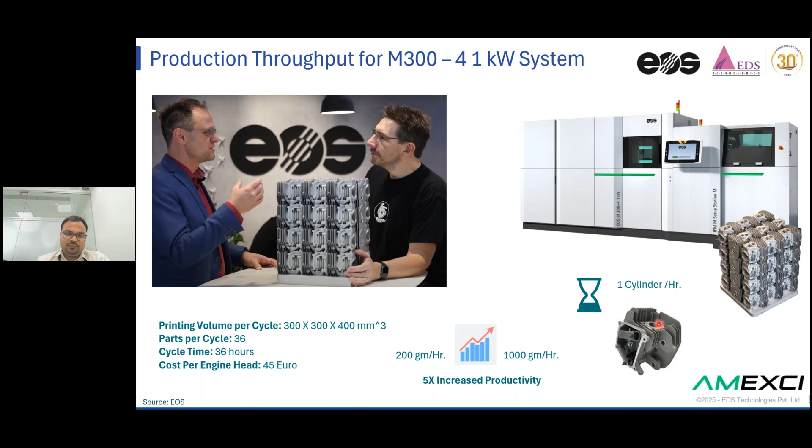So there are techniques which we are implementing in our EOS portfolios to improve the cost.

We also have web-based software to offer for cost analysis, which will help you on your design optimization and to prepare commercial reports and cost comparison reports.